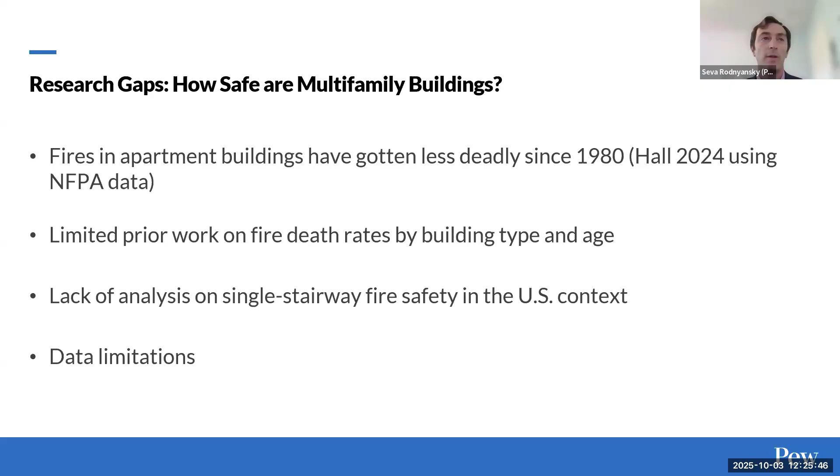Speaking about the data, I know there's some data nerds in the audience. Understanding fire death rates for us required combining multiple data sets. There's two publicly available fire death and fire incident data sets, both by different parts of the U.S. Fire Administration. The first one is called the National Fire Incident Reporting System, NFIRS, a data set where fire departments voluntarily report information, including what happened in a fire incident, and if there was an injury or a fire death, what happened in that. This has pretty good take up, but not all fire departments report, so it doesn't give full coverage to the set of fire deaths in a given year.

On top of that, the U.S. Fire Administration puts out another report called Home Fire Fatalities in the News, where teams at the USFA scrub local and national news articles for additional information about deaths. So together, we put those two data sets together, deduplicated any duplications, and then added any necessary information from archived news articles and clips about the fire deaths specifically.

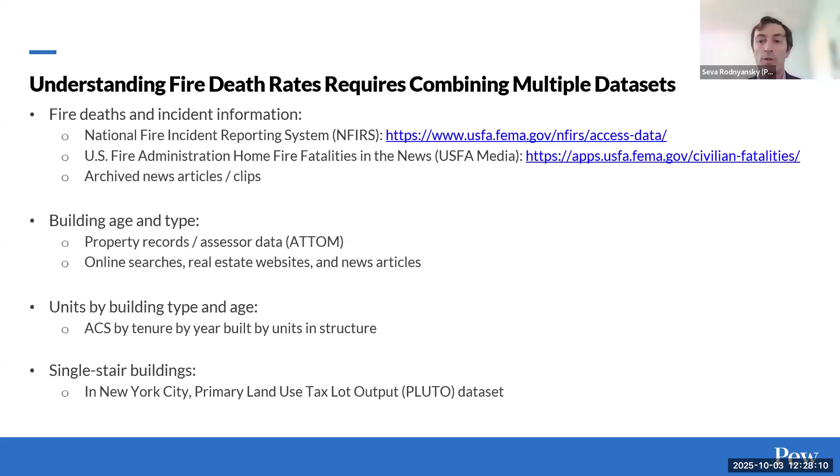So methodologically, what did we do? This is not going to be a lot of econometrics. In fact, there's none. It was a pretty simple approach. We merged the two data sets together and created a comprehensive data set of U.S. fire deaths for 2023, which is the most recent year that had complete data from both. We checked to make sure that 2023 was a reasonably representative year among fire deaths, and it was.

We also coded every fire death by housing type, whether it was in a single family or apartment building, the number of units, and the year of construction. We calculated a fire death rate measure per million residents in that type of housing based on these fire deaths and the total population living in each housing type.

Then we broke this out by state to make sure we understood the state-specific trends, not just the national trend. We added in additional years for small population states, and made sure we had at least 50 deaths per state to ensure we had some sort of sample to understand this pattern, both at the state level and nationally.

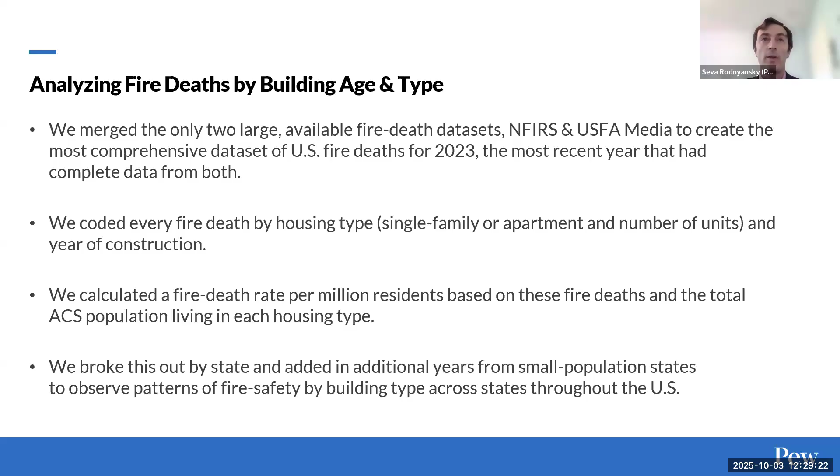Our headline finding is that when we look by building age and building type, new apartments have one sixth the fire death rates of other housing. Newer apartment buildings built in 2000 or later had 1.2 fire deaths per million residents, whereas older multifamily buildings or single family buildings had 7.7 and 8.6 fire deaths per million residents. These differences are statistically significant and of meaningful magnitudes.

Here's a little bit more specifics about the sample of fire incidents and fire deaths overall. From about 2,000 fire incidents that were deadly in 2023 and occurred in residential buildings, there were about 2,400 fire deaths. The bulk of the fire deaths were in single family homes, but also the bulk of Americans live in single family homes as well.

But what really stood out to us, if you look at the right-hand column that says modern multifamily, meaning apartments built since 2000, we saw there were only 20 deadly fire incidents in 2023 that resulted in 23 fire deaths. So the share of fatal fire deaths for that year in this building type was only 1%, even though 6% of Americans live in this type of housing. That was a very safe rate relative to the number of Americans living in that type of housing.

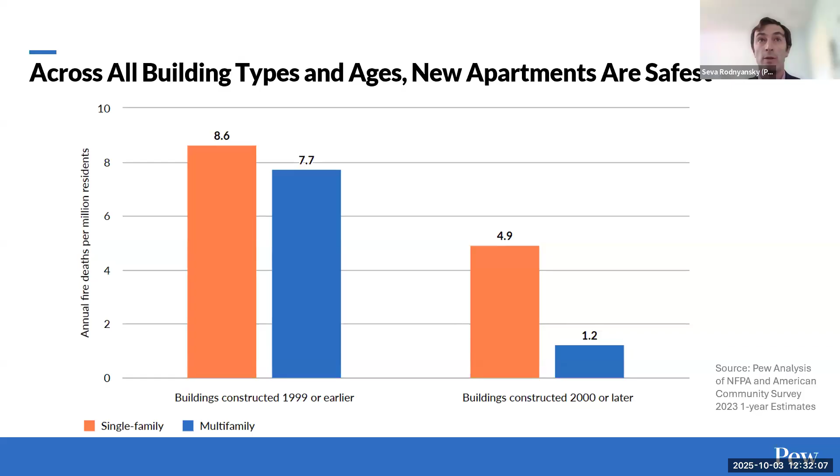When we disaggregated further by decade, because we wanted to see when these decreases really started, we were able to show a line chart like this. It shows by decade on the x-axis what the annual fire death rate per million residents was, and we see that both the blue multifamily line and the orange single family building line have decreased over time.

One particular trend we see is that the apartment line, the blue one, the fire death rate per million has decreased in such a steep way that the newest buildings, 2010 or newer, have 0.5 fire deaths per million residents, which is incredibly low. This provides additional information that newer buildings overall are safer, but newer apartments are really safe in terms of fire safety.

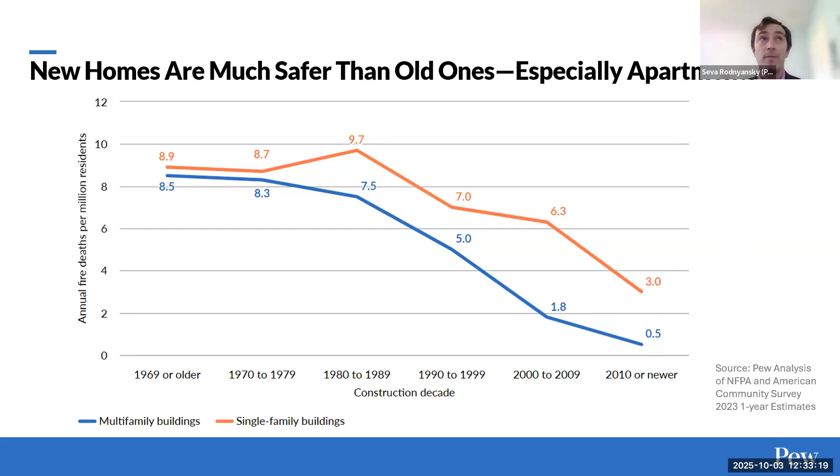We also looked at apartment building size. We separated 2 to 4 units, often known as plexes, from 5+ units, because we thought maybe there's a size consideration, that maybe it's the smaller or bigger buildings that are safer. But overall, we found the trend is similar, regardless of unit size, whether plexes or larger buildings, they are safer than old ones and had very low annual fire death rates per million.

Moreover, in most American jurisdictions, whether states or localities, the building code that governs apartment buildings usually starts at 3 units. So that would include some of the blue bars here and all of the orange bars. But 2-unit buildings or duplexes are governed by the International Residential Code, which covers single family and 2-unit buildings, and we thought maybe there were differences there. But again, from the data we have, it doesn't look like there's any real difference by building size for multi-unit buildings.

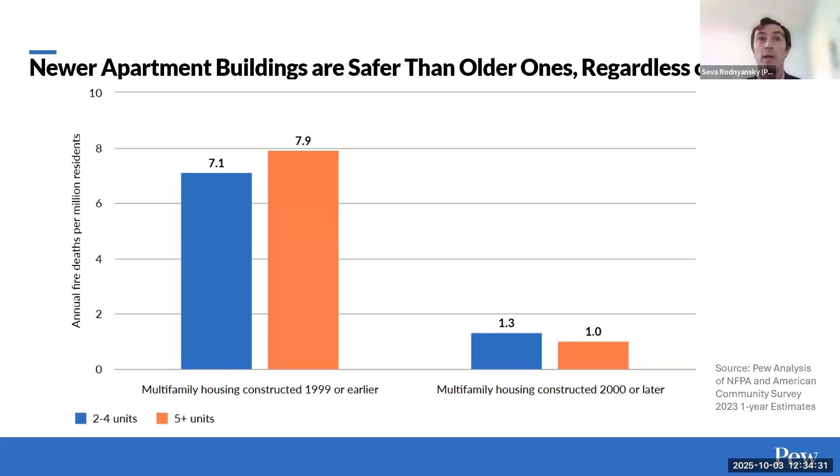Now, I just threw a lot of data and descriptive statistics at you showing that over time, buildings have gotten safer in terms of fire safety in the US, and apartment buildings even more. So you might be asking yourself, well, that's great, but what happened? How did that actually happen? There's multiple things that we think are going on.

First of all, modern apartment buildings are equipped with multiple layers of fire safety measures. This is partially a result of the proliferation of more standardized building codes in the 2000s and onwards, which made many of the things I'll talk about common in new apartment buildings. These include sprinklers, self-closing doors, smoke detectors that are on and work, fire-rated walls that can withstand fires for one or two hours, as well as non-combustible stairways, materials that won't light on fire and will withstand fire to make sure people can get out. These and other innovations in regulations, materials, and technology have made modern apartment buildings much, much safer.

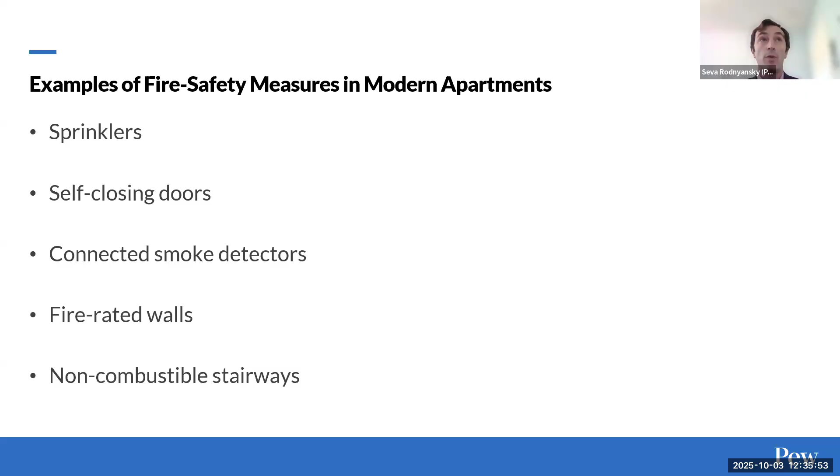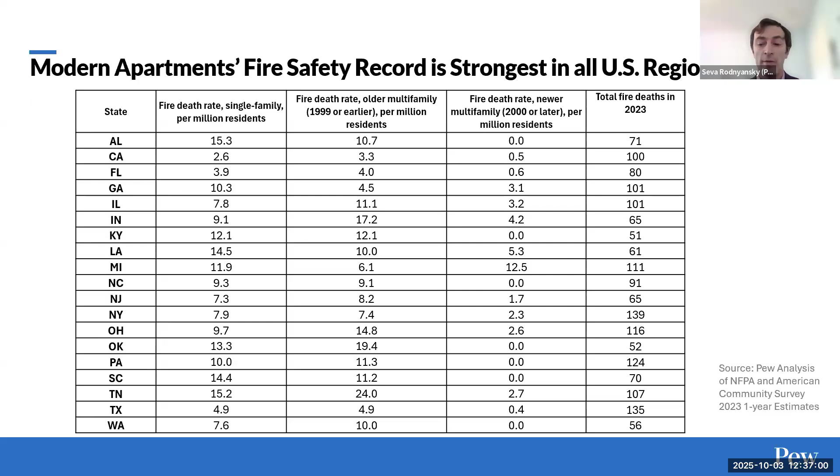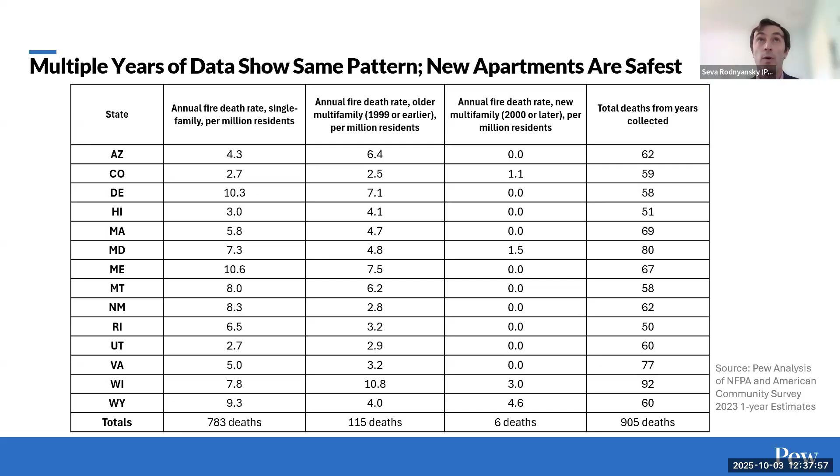We also looked at states with perhaps fewer than 50 deaths per year, and looked further back, since 2023 may not have been so indicative for each state. For the states displayed here, from Arizona to Colorado, all the way to Wisconsin and Wyoming, we looked at enough years of data so there were at least 50 deaths, often covering 2 or 3 years, or sometimes as far back as a decade. Again, in nearly every case, the annual fire death rates for new apartment buildings were much, much lower than older apartment buildings or single family buildings as a whole. It's the same pattern regardless of whether we look at big states or small states, one year of data or multiple years. New apartments are simply much safer in terms of fire safety and fire deaths.

So if that provides the data, what are the implications? I think the implication is that when you remove regulatory barriers to building more apartments, this in fact improves fire safety, because the more new apartment buildings you can get in a place as part of your housing supply, the lower the fire death rate.

Now, one of the other contextual pieces going on is that the US housing stock is in fact the oldest it's ever been. That's true for the housing stock as a whole, which is over 31 years old on average. For apartment buildings, and for rental units, they're even older.

Older housing usually lacks modern fire safety measures, whether that's single family or multifamily. So building more apartment buildings in any way possible, and frankly building new housing, new single family as well, will greatly improve fire safety outcomes.

Just to highlight how building age really strongly correlates with fire death rates, I wanted to share this table. Every row has the construction year, and this is only for multifamily apartment buildings, showing the number of fires and deaths in 2023, and the relative amount of people who live in apartment buildings built within each of these decades.

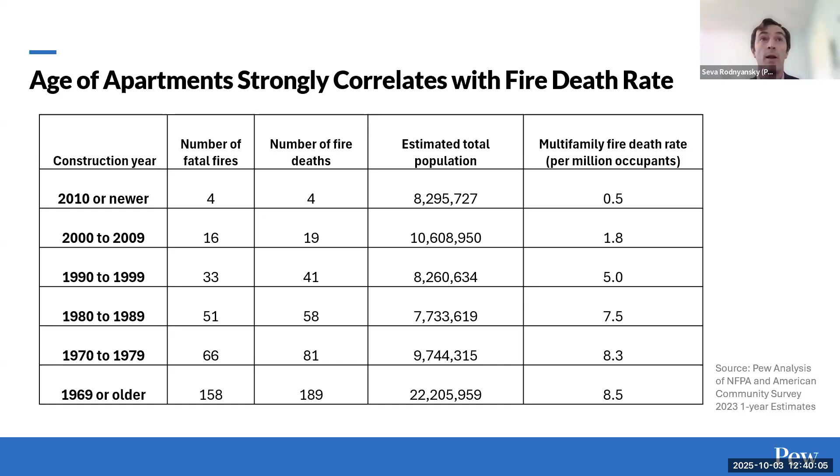The multifamily fire death rate for the newest buildings is staggeringly low: 0.5 for those built since 2010, and 1.8 for those built from 2000 to 2009. Again, the newer it is, the lower the fire death rate.

Okay, you might say, well, this was really nice, and new apartments do seem to have lower fire death rates, but how do we get more new apartments? You said there's all these caveats and potentially regulatory issues that stand in the way.

So we're going to look at one particular aspect that we looked at with Pew, together with the Center for Building in North America. Those are single stairway mid-rise buildings. I know the Joint Center did a presentation on single stair buildings, so some of this might be old news to some of you, but hopefully for others there's more to see.

Before we even get to single stair, I just wanted to highlight that states and localities have, in recent years, been enacting laws and passing measures to allow more housing types of all kinds. This is just a list of examples of what's happened in the past few years, but states have gone through and enabled accessory dwelling units.

They have legalized multifamily near commerce or transit, such as in Texas this year and Colorado last year. Some have streamlined permit approval processes, such as in Arizona this year, and others have limited parking mandates, such as Washington and Montana, and have done a variety of other things.

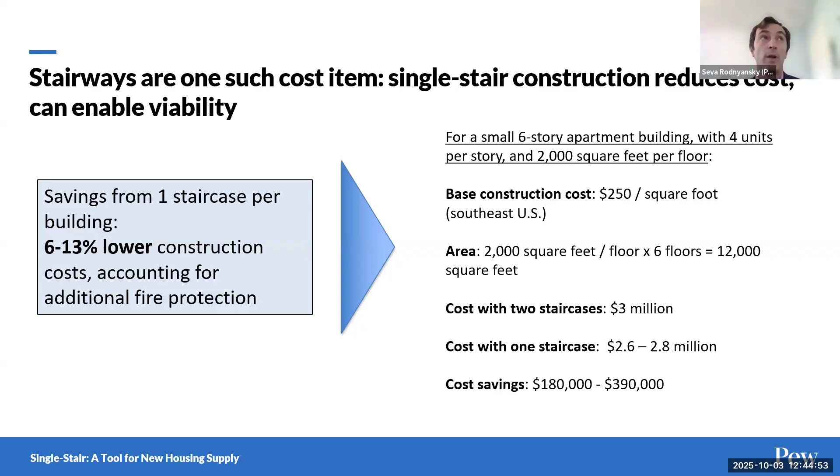Not only that, but having 1 staircase could increase the amount of rentable area in your building, which means you could charge more rent and tenants would have more space, or you could use less area.

This image is a rendering of one floor in a proposed five-story building in Jersey City, New Jersey. This five-story building has 2 units on each floor, so a 10-unit building. In yellow is the second staircase, and in green is the corridor to connect the second staircase. Together, those take up about 9% of the space on this floor.

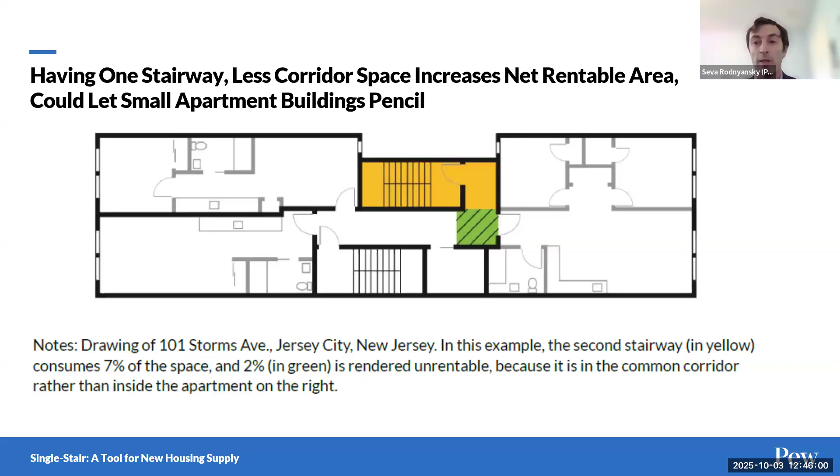So either you can add most of that space back to the units, perhaps an extra bedroom or a bigger kitchen, or you could take it out altogether and perhaps be able to build this building on a smaller or irregularly shaped lot. So having one staircase may help smaller apartment buildings pencil out financially.

Now, I've been talking a lot about this single stair, and you might be wondering what it really looks like. So here we have an example of the typical apartment building with 2 staircases on the left-hand side, also called the double-loaded corridor building. The staircases are in orange, and they're connected by a hallway or corridor, also in orange. Effectively, this means most units are only facing one side or the other.

In contrast, on the right-hand side is the single-stair 6-story building. Again, same height, slightly different size. The staircase is in the middle, and the units could look different.

These are renderings and examples of a single-stair building that is currently allowed in Seattle, in the state of Washington. Notably, Seattle, New York City, and Honolulu, as well as many European and Asian countries, currently do allow mid-rise single-stair buildings, versus pretty much all other U.S. jurisdictions, at least until perhaps the last year or two.

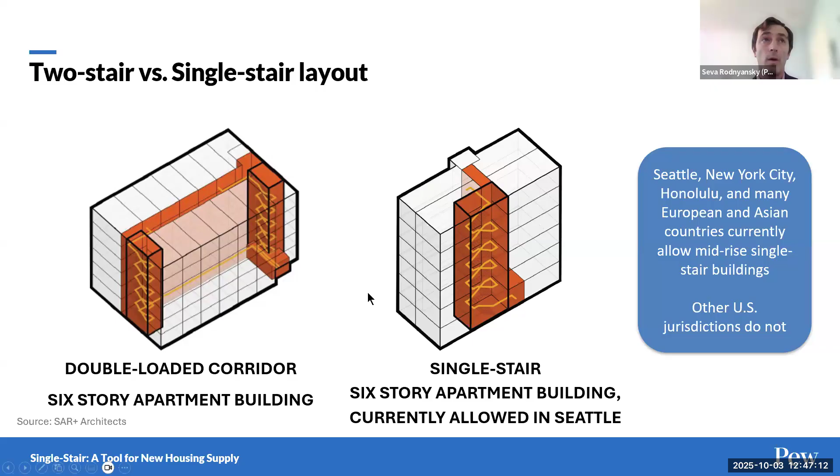On top of cost advantages and land utilization advantages, single-stair buildings can have more natural light and ventilation. On the left-hand side, the unit shown in blue can have a cross breeze, which can help with cooling, as well as air circulation to be less stuffy. On the right-hand side, the red diagram shows that with a single-stair design, most units should have at least 2 sides with sunlight coming in, if not maybe 3 or 4, depending on the size of units. The typical unit in a regular double-loaded apartment building only has sun coming in on one side.

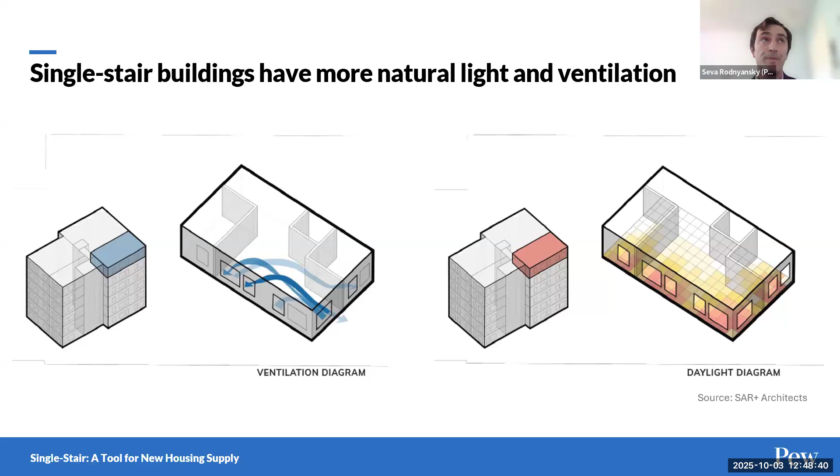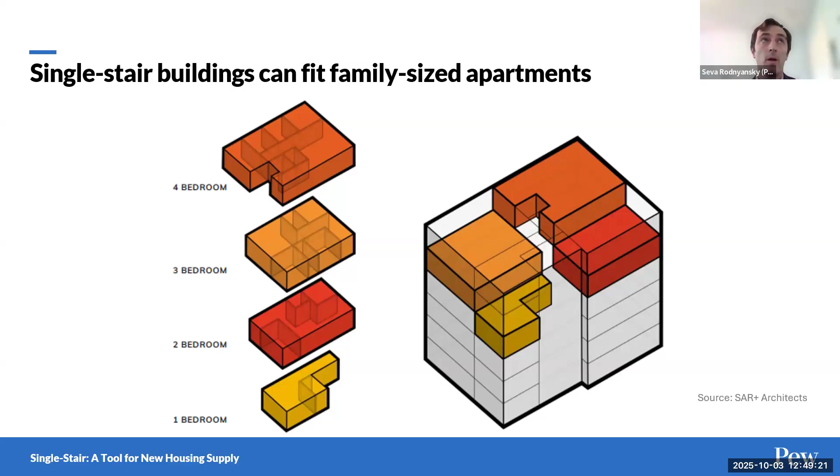Additional benefits are that these small single-stair buildings are great for fitting on small lots. They can fit well in historic downtowns and main streets, so they don't just have to be in big cities—they can be in smaller locations as well, and they can increase the types of housing units, for rent or as condos for own.

The New York Times recently covered odd lots, difficult to build, strangely shaped pieces of land, and single-stair type designs for mid-rise buildings are one way to actually fit well into these odd lots. Because these lots are harder to fill or build on otherwise, it's going to be a really good solution for them.

Those were a lot of the benefits, but some of the real questions on single stairway buildings in the US have been: are they safe? What happens during a fire? Are there fire safety considerations? Those are important questions, and we wanted to find out about them too. So again, we did this report with the Center for Building in North America to try to assess fire safety in single stairway buildings in the US context.

To put these in perspective, we wanted to show how big or small single stair buildings of the currently allowed type in Seattle and similarly in New York City are compared to what's currently allowed for a regular two staircase or double loaded corridor building. On the bottom, that tiny thing is the single stair building—about 1/3, maybe at most, of a typical American football field, whereas a regular apartment at its max allowable floor plate can be up to 620 feet long, almost double the size of a standard football field.

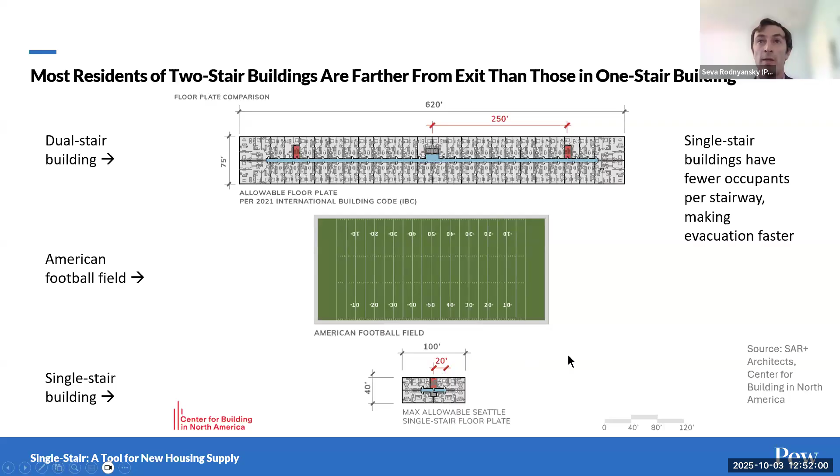On top of that, single stair buildings have fewer people per stairway, which makes evacuation faster. In the top building, someone might be going from the middle apartment to an exit and could be walking 250 feet or more, which is a lot in a fire. Whereas in a single stairway building, the way they're currently done, it's basically 20 feet from your door—you're pretty much right next to the exit, making it much easier to get out.

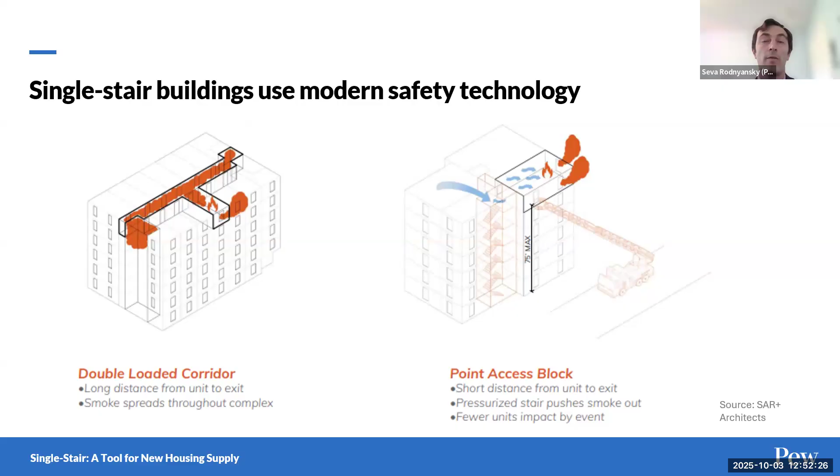As I said before, single stair buildings are built to modern building codes. That means they use the most modern safety technology: short distances from the unit to the exit, pressurized or protected stairways, and fewer units that can be impacted by a particular fire event. There's been little research on this, but in the Netherlands there has been a substantial report that looked at fatal fires and rescues by building type.

Again, this isn't our research—this is by the Netherlands Institute for Public Safety. They found lower fatal fire rates than apartment buildings with long corridors. So in the Netherlands context, this suggests that single stair buildings are in fact even safer than larger apartment buildings with multiple staircases and indoor corridors.

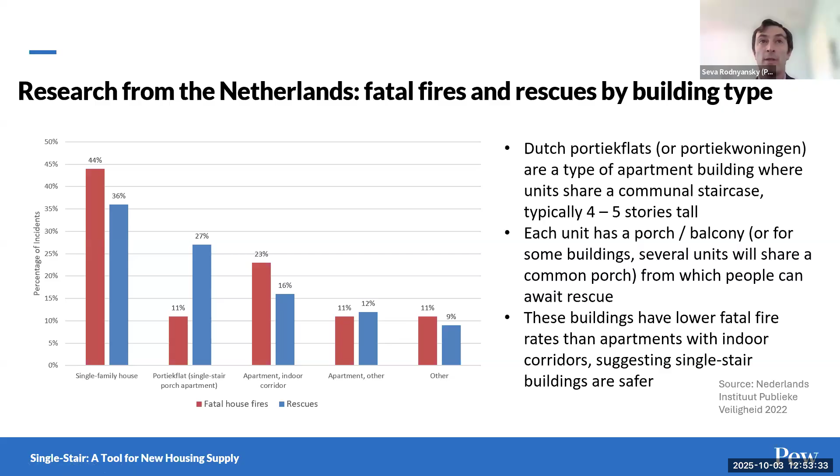Nevertheless, we wanted to see if we could find a US example and US numbers for building safety for single stair buildings. So we looked at New York City and Seattle, which are the only two US cities with a large number of modern single stair buildings, each of which has had this type of building allowed for almost the past 50 years.

So we looked in New York City specifically to see how many modern single stair buildings there are and to look at the number of fire deaths in each, comparing them to all other residential buildings. We went through the land use database in New York and found 4,440 modern single stair buildings. Looking at fire data from 2012 to 2024, we found that they had 3 fire deaths in those types of mid-rise modern single stair buildings.

We looked specifically at the fire deaths and pulled fire marshal reports for them, which concluded that the fires occurred in the unit.

They were not related to the exit or egress outside of the unit, and the fires did not spread beyond the unit of origin, meaning that even for those 3 fire deaths, if there were 2 staircases or more, it really wouldn't have mattered in those cases.

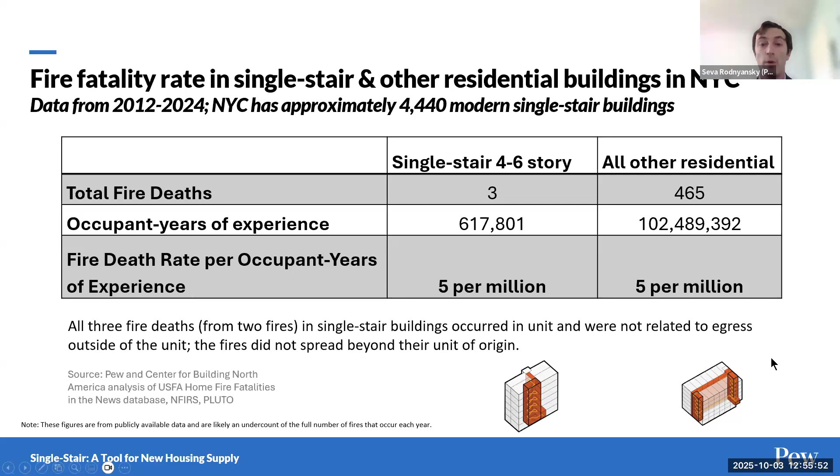We also looked at Seattle, which has allowed mid-rise multifamily single stair construction since the 1970s. From 2012 to 2024, there was one fire death in these types of buildings. Again, this fire death occurred in the unit, was not related to egress outside of the unit, and the fire didn't spread beyond the unit of origin. In Seattle, we weren't able to locate a denominator—how many single stair buildings there are total—based on their land use and parcel databases. However, it's estimated by others to have at least several hundred single stair buildings. So again, this type of construction appears to be extremely safe from a fire death rate perspective, at least in the two cases in the US where there are many of them.

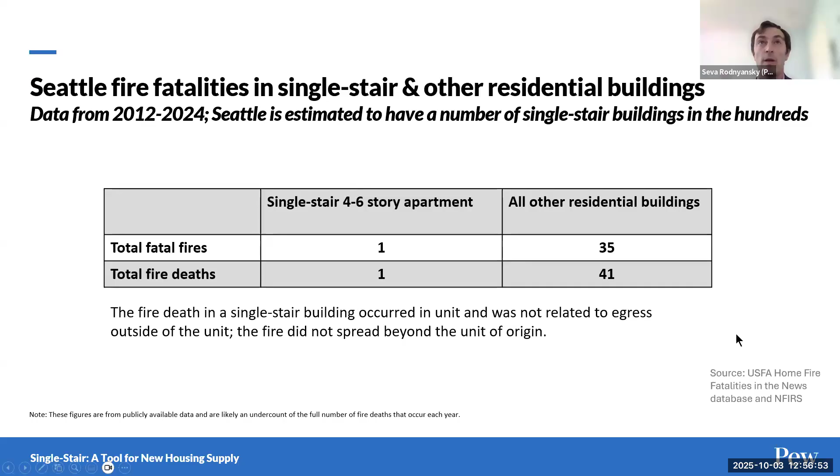And if we look at other countries that allow single stair at higher stories—in the US they're allowed up to 3 stories, elsewhere much higher—if they were really a problem causing higher fire death rates, we would find the fire death frequency, or fire lethality, higher: how many people are dying per population or per number of fires. But in fact, we find that fire death rates in countries that allow single stair mid-rise multifamily are actually lower than the US.

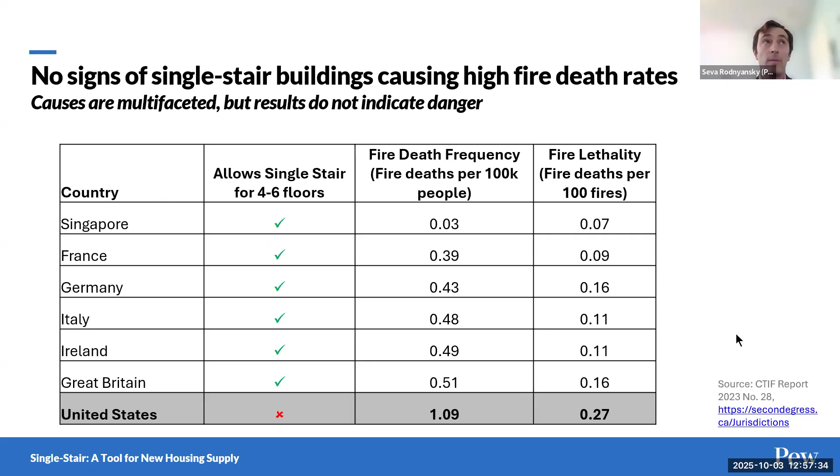We also looked at the things that would make single stair construction safe. These include mid-rise heights, not tall towers; limited floor sizes, either by unit count or area, or travel distance from door to exit; protecting stairways through self-closing doors or smoke control; modern fire-safe materials and systems, sprinklers, smoke detectors, and walls and doors designed to limit fire spread. This could work in any type of construction, whether in New York, where most is non-wood, or in Seattle, where most is made of wood.

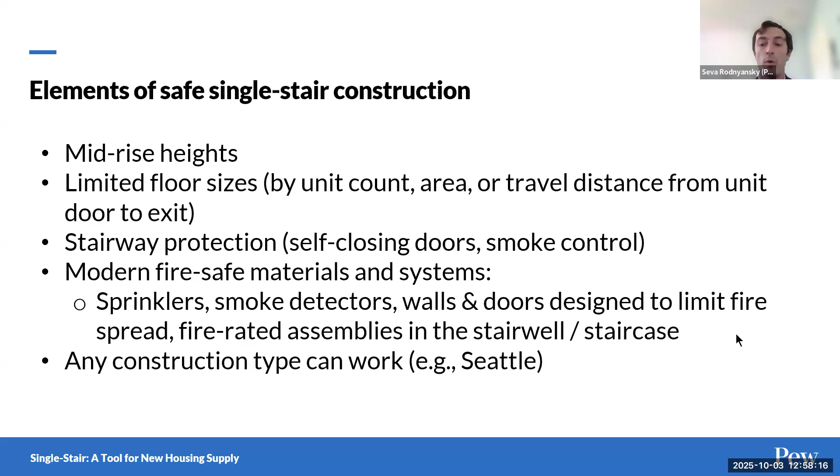The single stair idea, while newer and perhaps more niche, has certainly garnered recent attention, and I think discussant Tim Love is going to talk a little about the experience in Boston. But to preview, their analysis finds there's plenty of vacant and underused lots perfect for things like 4 to 6 story single stair buildings. If all of those lots were filled up with these, it could net up to 130,000 new units, which would close Boston's housing shortage by about two-thirds.

Moreover, on the policy side, over 14 states have passed laws to either authorize, enable, or study single-stair buildings in the past couple of years, including 6 this year alone. And finally, Austin, Texas recently authorized single-stairway building construction, and in fact has permitted its first mid-rise single-stair buildings earlier this year.

I know I talked for a while—this is the last page, so I want to recap and give the opportunity to David and Tim. So what did we learn today?

We found that new apartment buildings have very low fire death rates, 6 times lower than older ones. New single-family buildings are also safer than older single-family buildings, but not as safe as new apartment buildings—so building more apartment buildings would provide a large boost in fire safety overall. We also talked about modern single-stair apartments, which are built to code and with safety in mind, and based on New York City's experience, they have the same rate of fire deaths as other residential buildings. Finally, mid-rise single-stair buildings can really help close the housing shortage and improve fire safety overall.

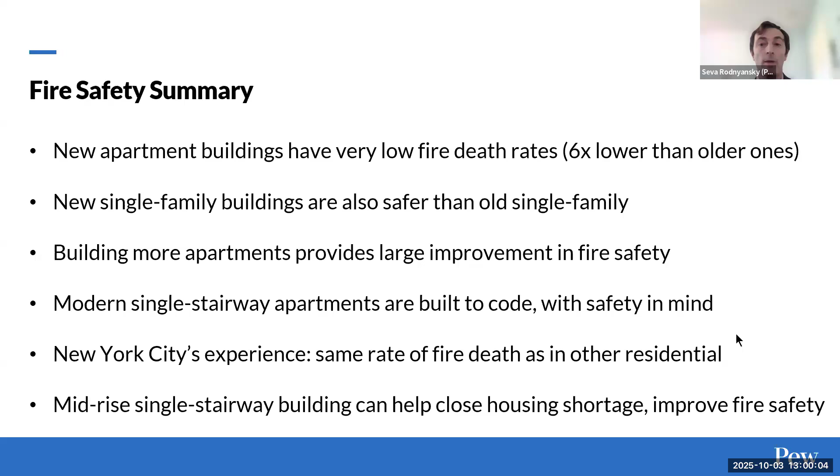Seva, thank you, this is just a thrilling presentation. As I indicated before, Tim Love has been a leading voice in efforts to think about how building codes affect design, quality, and affordability. Tim, is there anything that particularly struck you in this presentation that you want to highlight, discuss further, or take issue with?

I think it was a concise, thorough presentation, and a lot of the data points Seva brought up are new. In discussions I've had, mostly with fire safety professionals, there's the question of the necessity for a second stair — for fire professionals, if people are exiting down one stair, to use another one. I think the issues of allowable length of current double stairs is proof that while that might be an issue, it probably isn't with the 6 stories being recommended in a lot of this reform. I'd like to focus instead on what's at stake in terms of housing production, because that was the framing that brought us all together.

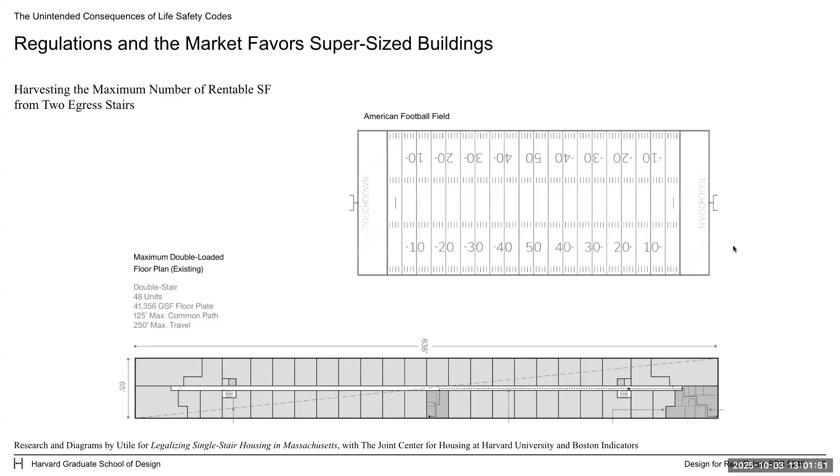Slideshow, okay. I wanted to come back to the diagram of what's allowed in terms of maximum building length with just 2 egress stairs, and frame it from a real estate development return on investment standpoint. The real estate market and developers are incentivized to harvest as much rentable space from 2 stairs as possible, because decisions about projects penciling out are really a game of inches. So the market actually prefers buildings that have this length of corridors.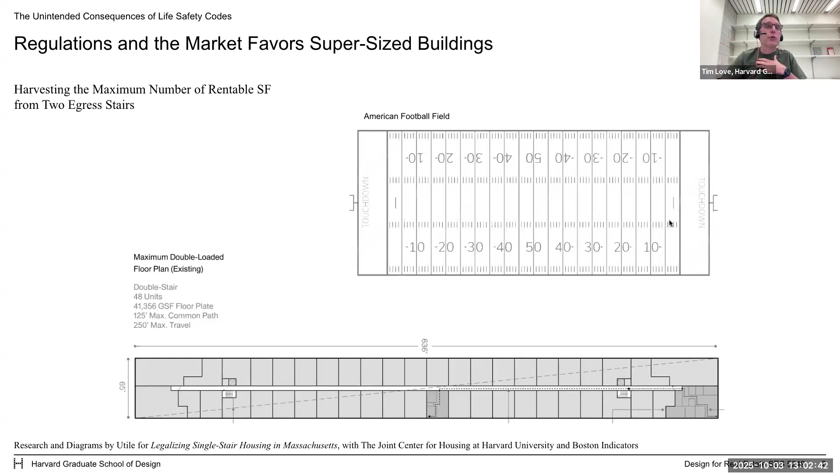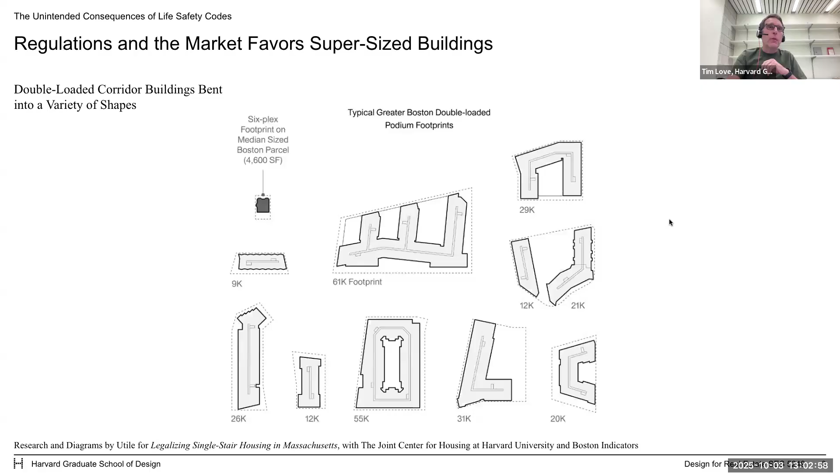And the way the market deals with it, on large sites, is to essentially curl these buildings around into all kinds of configurations — C shapes, E shapes, F shapes — to try to get long corridors to fit on sites. The consequence is that this is what housing production looks like: a strategy to maximize the length of corridors and reduce the number of egress stairs.

So you're seeing on the left the kind of development happening around the commuter rail station in Chelsea, and then recent residential development — a zoomed-in snapshot of what the market is building in Alewife in Cambridge. This means that most of the housing production happening, at least in Greater Boston, is on these large post-industrial sites.

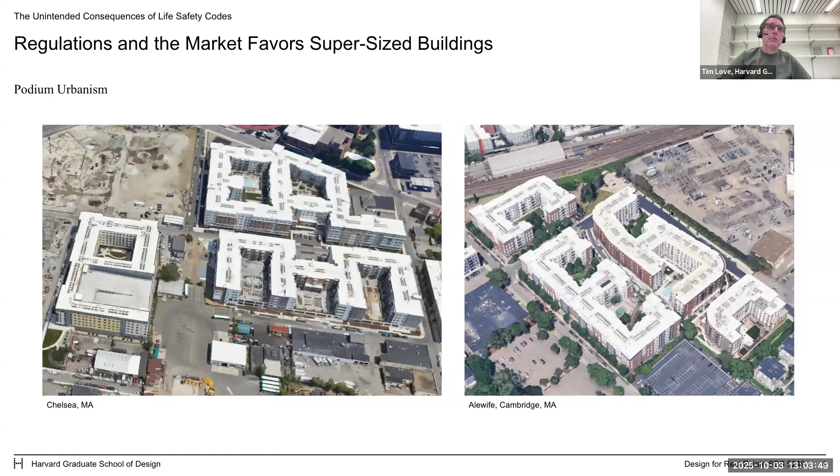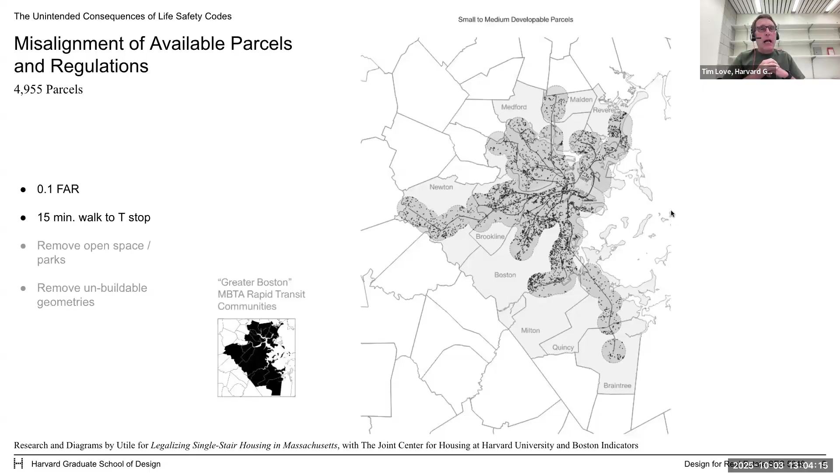But when we ran an analysis of developable sites within a 15-minute walk of transit in Greater Boston, we looked at sites with a higher propensity for redevelopment because they had an existing FAR of 0.1 and lower. We removed other data points in the GIS analysis — open space, lots too skinny to build anything.

The consequence was that most of the available lots actually work for these small buildings we've been talking about today, but there were very few left that would work for big double-loaded corridor buildings — rough justice, 14,000 to 15,000 square foot lots and above. So the biggest opportunity for TOD development in the Greater Boston area requires single-stair buildings, because a 2-stair building with a residential floor plate smaller than 9,000 to 11,000 square feet just doesn't work in terms of the net-to-gross ratio. It's very hard to get the underwriting for those.

So this is not just an issue about fire safety, it's about housing production. I just wanted to bring that point home as part of the session today. Turn it back over to you, David.

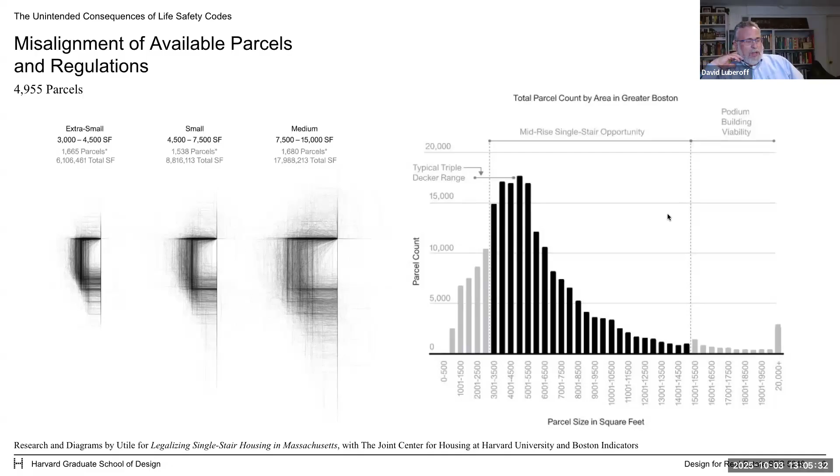Thanks for the clarifying question, everybody, and David.

So one of the reasons we're seeing this distinction is because in 2000 and the few years onwards, the set of organizations and building codes in the US kind of coalesced into one, run by the ICC, the International Code Council. They have two building codes: the International Residential Code, which covers 1 to 2 unit buildings, and the International Building Code, which covers 3 unit or greater buildings.

So all the apartment buildings we're talking about. These were really adopted by states and localities, especially the International Building Code, throughout the early 2000s and onwards, such that by the later 2000s it's pretty well adopted throughout the country. That leads to some standardization in the types of building codes adopted, and these have sprinkler requirements, more sophisticated smoke alarm requirements, and others that really permeate through.